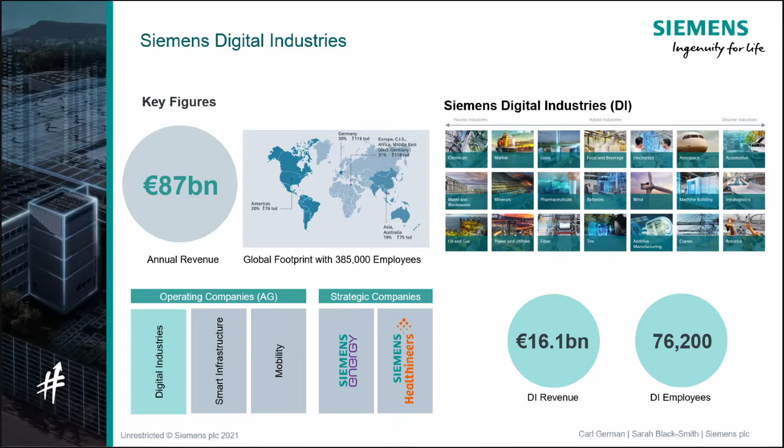We've got an annual revenue of 87 billion euros globally, and a DI revenue of 16.1 billion euros, and we've got about 76,000 employees. We span across process industries such as chemicals, water, wastewater, right the way through to discrete manufacturing such as automotive.

We are here today to give you a bit of an insight into one of our manufacturing facilities, which is in Congleton in the United Kingdom, just south of Manchester. We are one of the oldest manufacturing facilities in the UK that has always been a Siemens site. We employ approximately 450 people, and we're manufacturing variable speed drives, which control the output of a motor. So all around energy efficiency, which is really topical today, we manufacture in our facility approximately 1 million products annually. That's a mixture of standard portfolio and configured portfolio that can be amended to what the customer wants, and tweaked to be the best version for the customer.

In terms of where we've come from, Carl and I want to give you an overview of the journey that we've been on and the strategy, as Kat mentioned. So in terms of themes, if I go back to around 2009, that's when the credit crunch hit, and it hit Congleton quite badly. We had a lot of stock, we didn't have any orders. We had to make some difficult choices at that time to get back to profitability.

As a result of that, our strategy going out to 2011 was all about becoming lean, becoming world class, and really shoring up the way that we produce, to set us on that journey of continuous improvement. Moving on into our strategy for 2015, that was all about becoming world class, benchmarking ourselves against the best of the best, in the UK and globally.

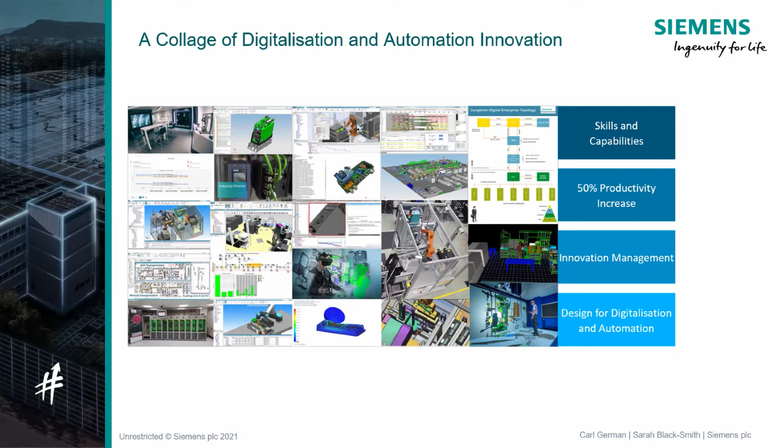So lots of technology, lots of innovation across our entire end-to-end that hopefully creates opportunities and makes us more profitable, and provides that additional value to our customers.

So what does all this mean, to be honest? Well, what I want to do is quickly show you a use case that we went through, which hopefully has a few touch points through our innovations, digitalization, and automation technology that we've been deploying at Congleton.

So the example I want to show you is a piece of automation. You can see the products on the left-hand side, and the actual eventual automation platform - I'd call this a digital twin of that automation platform. The main protagonist in the story is the cardboard box, and I've got a newfound respect for cardboard, to be honest. It's a tricky material to actually automate. So let the story begin.

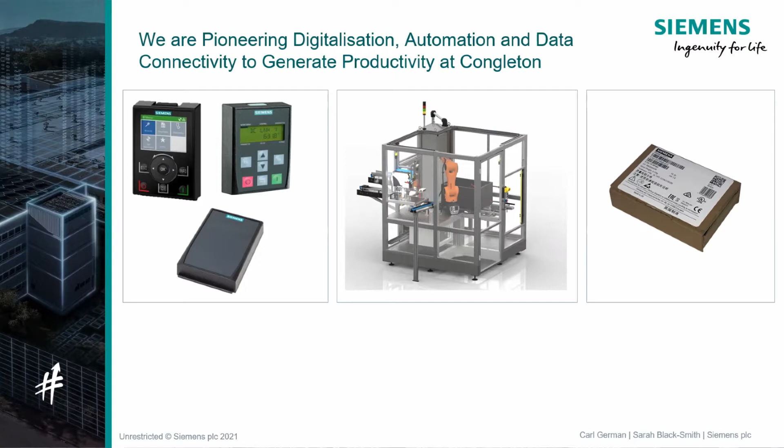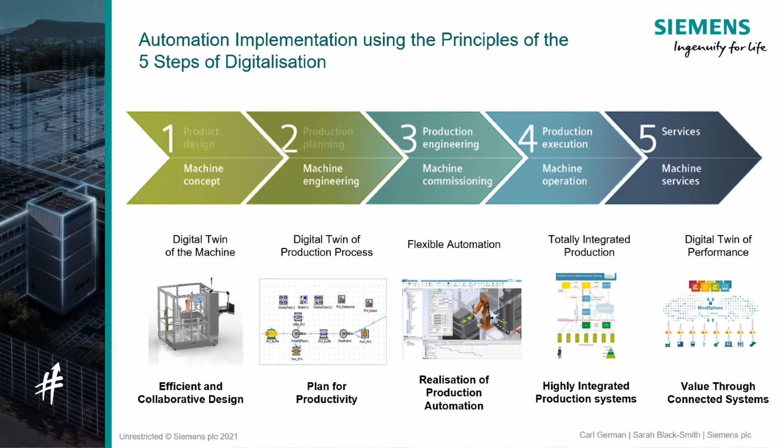Siemens coined a number of years ago these 5 digitalization steps, and you can think of it in the context of a product - designing a product all the way through to selling it to the customer, and then having a service to that product - or you can think of it at a machine level, so an actual asset within your factory. So what I'm going to do over the next few slides is give you some insights into some of the digital technologies that we've used to facilitate this step change within our factory.

So the first one was product development or machine development. The important thing about this particular project is it had many consortium members - it had manufacturing engineers within Congleton, R&D engineers within Congleton, the supply of the packaging, and the supply of the machine. So lots of interaction, lots of creative thinking to arrive at an end solution.

What was really key here was that efficiency of collaboration, and there's no better way to facilitate that than using digital tools and digital modeling. You can see here in the top left that we started off with a rough concept of the design. Then on the top right, you can see where we're using our virtual reality computer aided virtual environment, our CAVE, to peer review this. This is really important because it's a technology that's reusing the rich digital content, bringing people together and actually reviewing and understanding its capabilities in a virtual world.

And this is really, really important. It's all about learning and failing in the virtual world. If you're learning and failing in the physical world, that's costing you time and money.

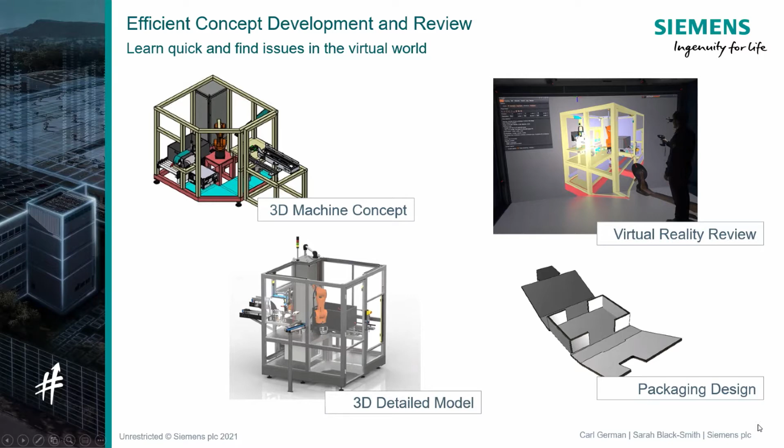So in parallel with that process, we have what's called production planning, using more rich digitalization tools to simulate the factory. Our factory is represented in terms of resourcing assets, and what we've done is model our factory so that we can understand the efficiency, the utilization, and the capacity of our factory.

In this instance, it's some case scenarios to do with different automation levels of this particular solution. Again, this is really important because you can scenario test in a safe place and not make changes to your physical production flow and find out that actually there's something not quite right.

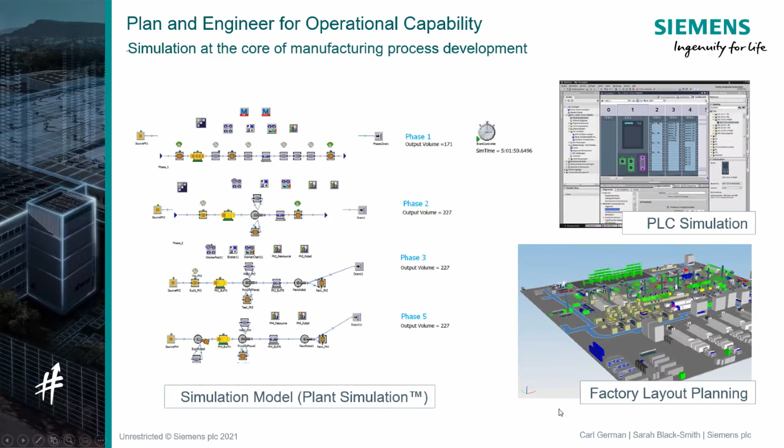As a further parallel process, the next step is the actual engineering of the processes. Here we've used kinematic modeling of the actual solution. What you get from this is a real sense of the capabilities, the constraints, and potential problems with the end solution in a virtual world.

So then you can articulate that and make changes, so that when you commit to the physical world, you're confident that what you're going to implement is fit for purpose. One of the next steps is to take the kinematics and, from a software point of view, use the model to download into the actual physical assets, so things like robot programming become a more efficient and effective process.

We're all about using novel technologies, and there's some complexity within this end solution. We've used 3D additive manufacturing to create complex robotic end effectors. Again, it's all about learning and simulating in the virtual world, reusing that rich digital information — the actual product used in simulation is the 3D product designed as part of the product development process. So, highly efficient reuse of information.

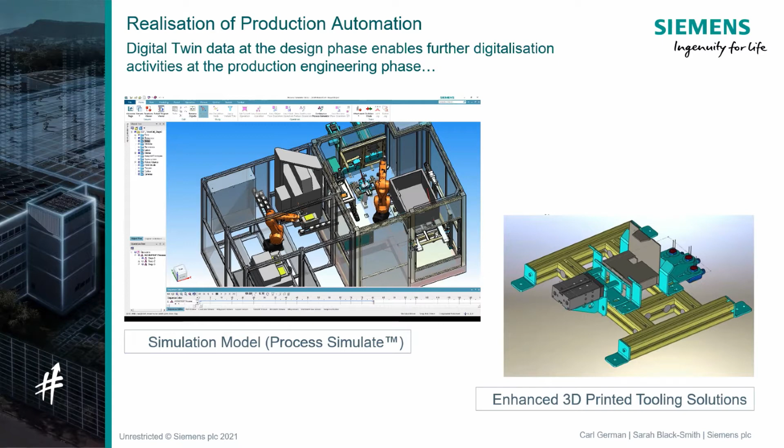But obviously then we're into a situation where we need to physically build our products. An interesting point is this make-to-stock strategy moving to make-to-order. In terms of our part numbers within the factory in the make-to-stock world, we had roughly 700 to 800 part numbers across the whole factory for our products. With the onset of one new product, which was a configured product, that went to 30,000. So suddenly there's an order of magnitude step change in the complexity of how you manage your products through your manufacturing processes, and how you hit those really high efficiency points when dealing with variation.

Tuned into that, our manufacturing execution system, the software platform that runs our factory, had been developed over 15 years and was circa 400 to 500 separate software components. It worked, it was very good, but obviously that's not sustainable.

So we chose to redeploy our manufacturing execution system to make it a highly connected ecosystem where customer orders come in, and rule-based systems take that customer order, use definitions from our production engineering department, use definitions from our R&D department in our central repository, Teamcenter, and then pull in information to do with factory scheduling, and actually create a recipe that's automatically pushed down to the factory floor, mobilizing our assets automatically to manufacture exactly what we need — almost heading towards that batch size of one.

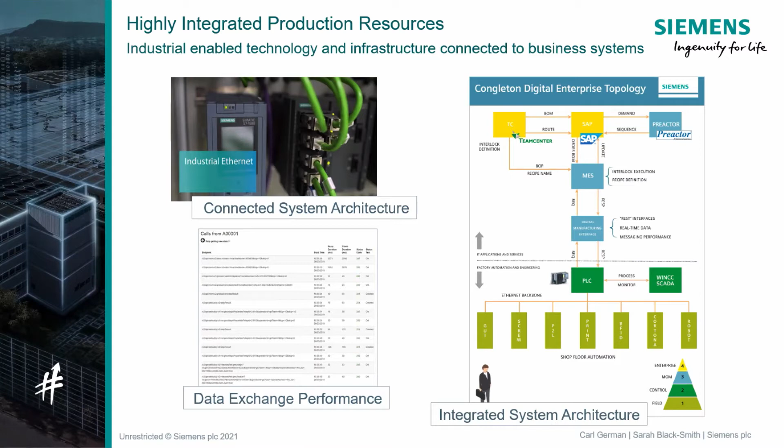So moving forward into the last arrow, which was about service. Data is the driving force behind everything now. I mean, data isn't new. Sometimes it's spun that it's this fantastic new novel thing that suddenly hit everybody, but data is as old as the industry itself. But the appreciation of data, the systems, the business systems, and the intelligence and processes we can apply to data has made a difference. So really it's about how do we turn data into useful information.

And we've viewed our core manufacturing processes in this instance in terms of core assets, core processes, and infrastructure. So it's about how do we use data to maximize the value of these particular domains within our factory.

Part of that involves cloud-based systems. Some of these involve industrial edge based systems. So again, what we're now doing is understanding the role of high speed, low latency edge within our manufacturing processes, where you need very quick analytical feedback on the capability or processes or decision-making capability of those processes, but also how do you use cloud-based systems as kind of the overarching housekeeping element.

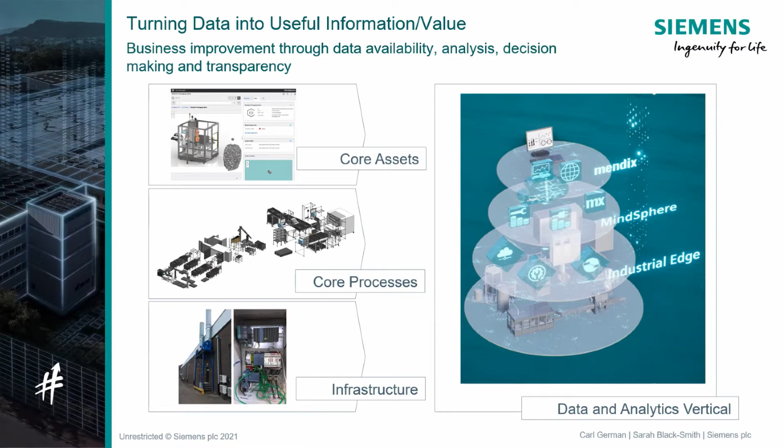Just gives you an overview, this presentation, this video of what Carl's spoken about, the cell that we're talking about.

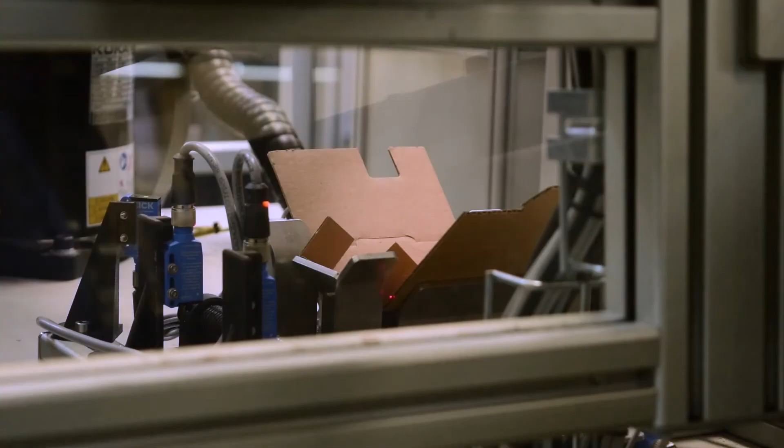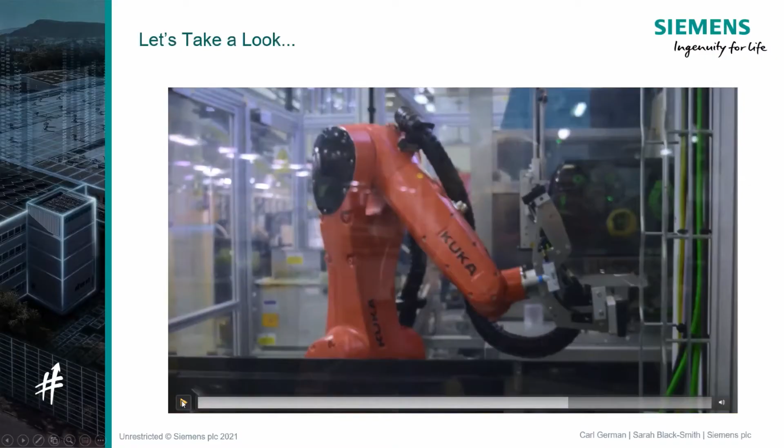That's the challenging cardboard that Carl was talking about. So thanks, Carl. I'll stop that. Move on to the next one.

So what we wanted to do now is say where are we going next. So our strategy at the moment is called 1 by 23, and it's all about, well for one, we've got a shorter time period because we recognise, to take what Carl was saying at the start, that things are moving a lot quicker now. So previously we would have gone over a 5-year range, and now it's much shortened, we feel. So probably 3 years isn't quick enough either, but this is our want to give you a quick overview in terms of the quick video, and then talk through what our plans are next.